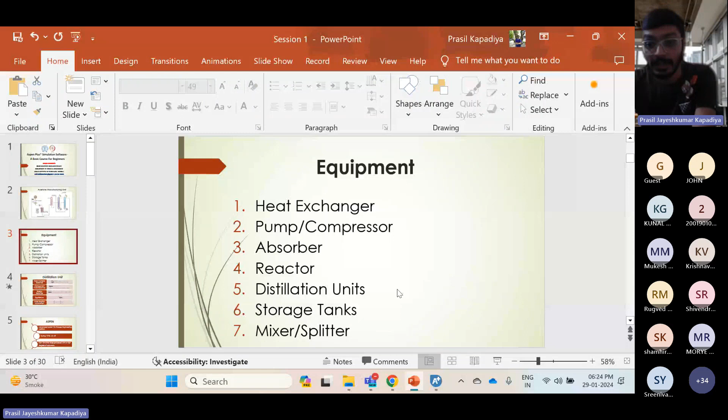Okay, so there are various kinds of reactors, and here in this example, it was a tubular reactor. Now, distillation units. Distillation units are the heart of any chemical engineering plant. Why is distillation so important? Because it is a separation method. After reaction, there are hundreds of things in our product stream. So we need to separate from that mixture something that is useful to us, that is valuable for us. So that's why in most chemical plants you will find distillation units, from very small heights to very large heights.

Then storage tanks. What is the use of a storage tank? To store the products or to store our reactants. After our reaction is performed, after separation is done, we need to store our product at some place and then we transport that product. So for that, storage tanks are used. There are also various kinds of storage tanks.

And mixer and splitter. What does a mixer do? A mixer mixes two or three streams. Let's say for some reaction we need a mixture of two reactants, so for that we can use a mixer, or a splitter to split the streams. Okay, so these are various kinds of equipment that we can see in any chemical engineering plant.

Just a minute, someone is waiting.

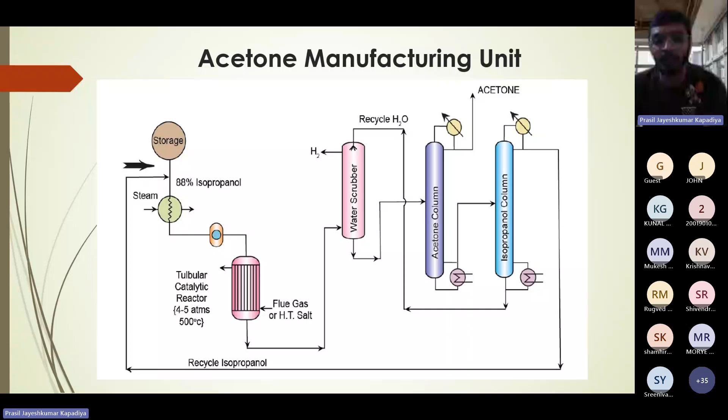Not feasible. Let's say you are operating an acetone manufacturing unit. Your plant manager told you that you need to increase the feed flow rate to meet some market requirement, or we are going to increase our acetone purity. So how will we do that? We will have to play with feed flow rate, with the reflux ratio in the distillation column, and we may have to increase reboiler duty. So there are options, and the plant is already there. Let's say my feed flow rate is 100 and now I want to operate my plant at 130, 150. Can we do that?

Yes. Sorry. Can increase the flow rate? I'm sorry, I can't hear you. Can you repeat? We can increase the flow rate. We can increase it, but we need to check the limit.

Yes, in a plant there are 100 connections. Let's say isopropanol is coming from some upstream unit and acetone is going to some downstream unit. Can we just increase our feed flow rate and just do it? No, we can't do it, because plants are also designed at some particular capacity. You can't go beyond that capacity.

Okay, so in a plant, as one of you already mentioned, we can't solve 150 equations simultaneously and at that time check what is going to happen. Is it going to affect my acetone purity or not? We can't do that. It is not a practically feasible solution.

Correct? So there is a need for something with which we can directly see the effect of feed flow rate, reflux ratio or something, without implementing that in the real plant. Okay, so that's why we are learning Aspen. I hope the motivation is clear to everyone, why we are first learning this software.

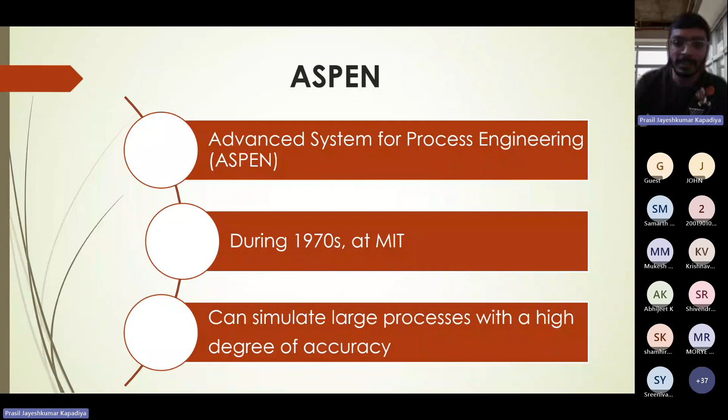So what is the full form of Aspen? How many of you already knew the full form of Aspen before this slide? Yes. Okay, good. So Aspen is Advanced System for Process Engineering and it was developed during the 1970s at MIT. Initially it was developed to solve a series of nonlinear equations, but now we have many Aspen products available. So we can simulate large processes with a high degree of accuracy using Aspen.

Guys, please next time join on time.

Okay, so first let's talk about Aspen Plus. Aspen Plus is basically used for steady state simulations of chemicals. The distillation column equations that I mentioned were unsteady state equations because there was a dM/dt term involved. That gives us time evolution, how our product quality and everything is changing with time. So Aspen Plus is steady state simulation, and Aspen Dynamics is used for dynamic study.

So how does Aspen Plus work? Aspen Plus works on the sequential modular approach. What is the sequential modular approach? Can someone tell me? I guess sir has discussed. It solves equations unit by unit, block by block. Yeah, it solves equations unit by unit, block by block.

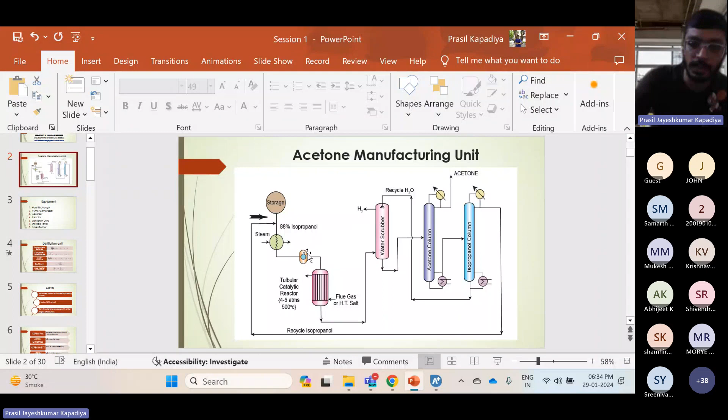Now, I'm sorry, I'm here. Okay, so what can we do with Aspen Plus? Say you are in a plant and you are told to use Aspen Plus. What can you think of doing with Aspen Plus in a particular plant? Let's say with that acetone manufacturing unit, what can you think of doing?

Hello, someone please respond. I'm sorry, you are not audible. Sorry, can you repeat please?

We can find out the head, the flow rate and power consumption of a particular equipment, or the heat transfer area, and optimize the plant. We can find out by Aspen Plus in steady state simulation. In HYSYS, it's a bit complex.

Someone told optimization of plant. That is the best example. We can optimize the plant. Other than that, sensitivity analysis. Yeah, sensitivity analysis. We can see the effect of one parameter on another parameter. Like we can see the effect of feed flow rate, keeping everything constant, on product purity. Then we can see the effect of reflux ratio, keeping everything else constant, on product purity. We can increase reboiler heat duty and see the effect.

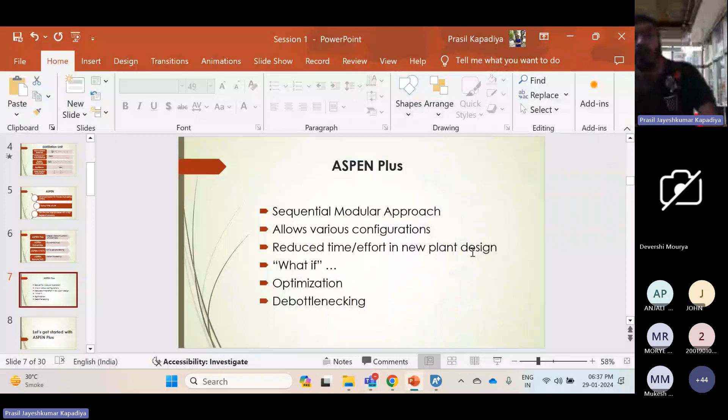Then we can perform debottlenecking. What is debottlenecking? Let's say in any plant, product quality is the issue and no one is able to find out from that actual real plant. So we can perform various analysis and we can debottleneck what is the issue. I guess it's fine for everyone, right? Should I move ahead? Yes, sir. So debottlenecking means solving a problem related to the plant, or troubleshooting is identifying the problem. Yes.

I will share a little story. I was in Reliance. There was a plant, I don't remember the name. They were entering their feed at some particular tray number, and that was not giving maximum product quality. So they performed this analysis: what is the issue and how can we solve that. They changed the feed tray location and saw that if we enter our feed not at tray number 5 but at tray number 10, it will increase our product purity.

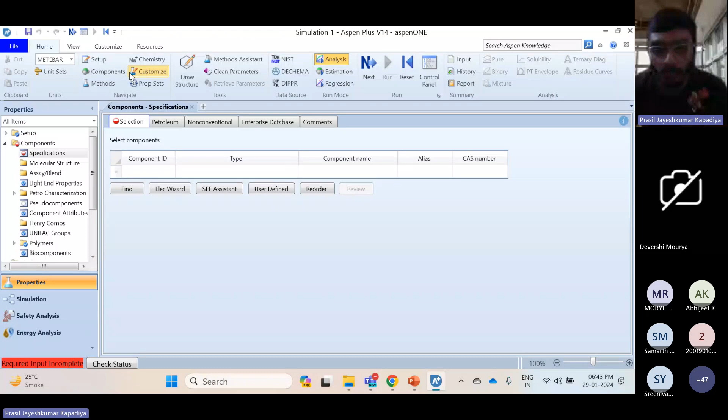You'll have to bear a bit with my internet connection or laptop. Which version is provided to all of you? Is it 14 or some other version? Aspen 12.1. Okay, you guys are provided with 12. Okay, this one is 14.

I have 14. Okay, so first, when you open the window, you have this properties tab, simulation tab, safety analysis and energy analysis. Currently, it's not important for us. Then in the top screen, this one is for units. These are English units, this is metric unit with Celsius and bar, and SI unit. In English units, pressure is in PSIA, mass flow is pound per hour, mole flow is pound moles per hour, enthalpy is British thermal unit per hour, and volume flow is cubic feet per hour. So according to our requirement, we can choose units, or we can change it later. So this is about units.

Then the analysis part we will do today, so I will show it to you. Then, let's go for components, how to add a component. So first go to find. Let's say I want to add benzene first. So I will write benzene and click find now. So there are so many options available. If you can see here, begins with, contains and equals. I have chosen contains, so all components that have benzene in their names will be shown here. If I go for equals, it will only show benzene. So it is up to your requirement.

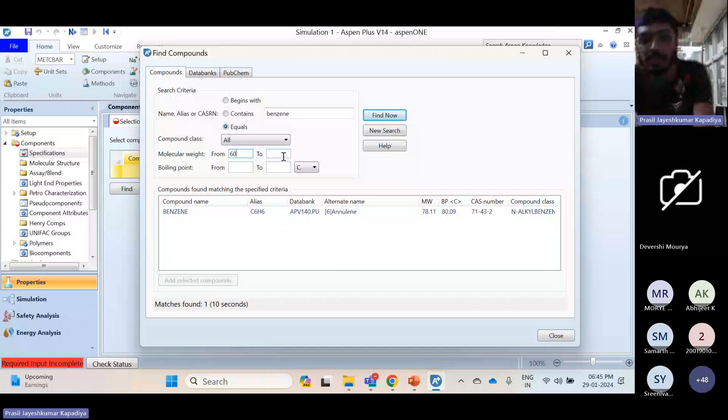Then we can also search our compounds based on molecular weight. Benzene has a molecular weight of 78. So let's say I want to search from 60 to 110, and let's see what it gives. So in this database, only benzene is having 78.11 molecular weight. Okay, I have chosen equals. If I go for contains, it will show everything within 60 to 110. I guess this will be a huge list because we have chosen contains.

Someone is joining. Guys, please join on time from next session onwards. Okay, I'll close this currently.

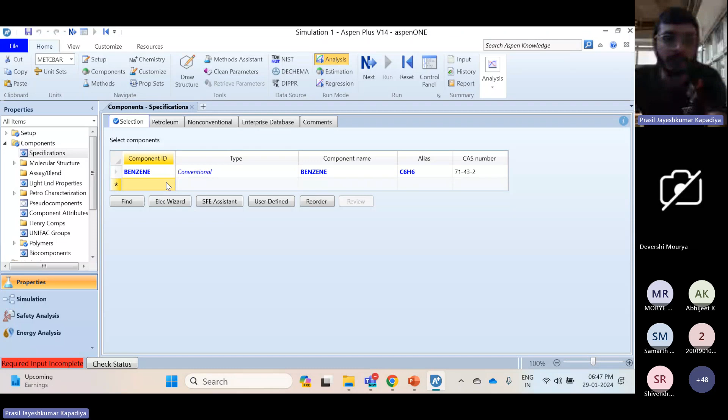So we can add a component. Let's say I'm currently going for benzene only. I'm typing benzene, find now. Then I will add this component. Now, let's say I want to change the name here; this is the component ID. This name will be reflected in your stream results. Like if you have given BENZ01, it will show BENZ01. So we can change this name from BENZ01 to benzene. And what is the limit? How many characters can we add? Anyone? 8 characters. Yeah, up to 8 characters we can add. Let's say I'm trying to write benzene 1, 2. I can't go ahead, it won't allow me. Okay, so just benzene.

One more thing I want to show. These are the data banks from where the properties are selected, and you can also search from PubChem. Like say I want to search m-cresol.

So it will appear here. Yeah, all components containing m-cresol will appear. Okay, so this is how you can add components. Components can be added based on the name, plus if you know the molecular weight range or if you know the boiling point of the component. So you can add components like this.

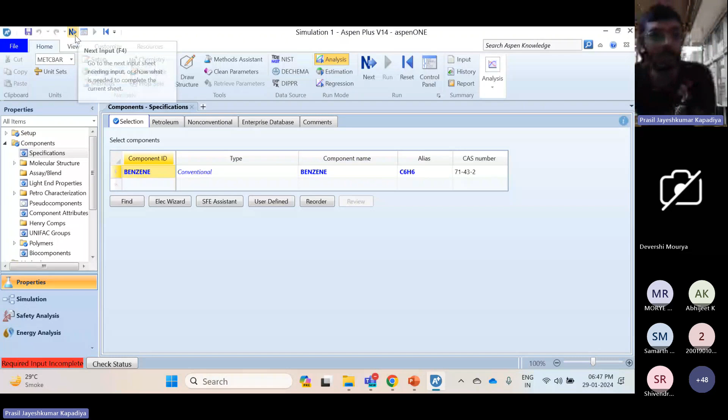Now, okay, I have already added benzene. Now I want to move ahead, so just click on the next button. This is the next button, with the arrow. So here, this is the section for methods specification. Why do we need this methods specification section? Can anyone tell? To estimate the properties, maybe thermodynamic or chemical properties, physical properties.

Okay, so from this section, we can add methods. Say I want to simulate my block using NRTL, so I will use NRTL. What is NRTL? NRTL is non-random two-liquid theory. If it's a gas-phase reaction, someone may want to go for the SRK equation of state, or let's say VTPR. VTPR is nothing but the volume-translated Peng-Robinson equation of state, or some liquid activity coefficient model, UNIFAC or UNIQUAC. So we can choose these models from here.

So this depends on which kind of system you are working with. We will see one example where we are using an ideal system. So what is an ideal system? That basically follows ideal Raoult's law. We'll see this. So I'm just adding this. Currently, it's not important.

Okay, one more question I have. In petroleum calculation options here, you can see it is free water method. What is free water method? Can someone tell me? It will not be useful for us currently because it is mainly for petroleum products. But since it's already there, can anyone tell me what is free water method? If we have water as one of the chemical components? Sorry, I couldn't follow you. No.

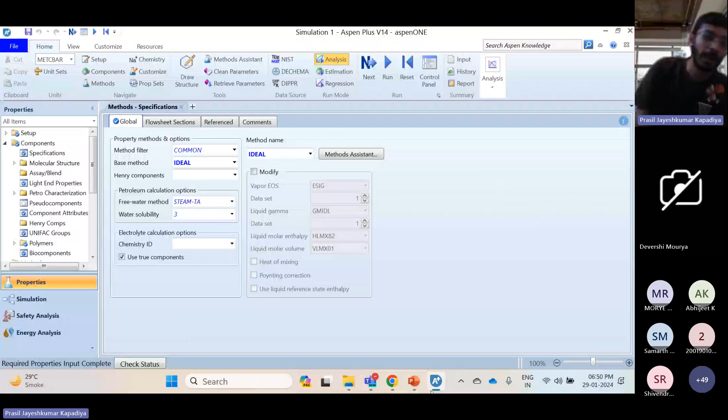Okay, I will tell you. In oil processing units, we get two phases, a water phase and an oil phase. Water is also soluble in the oil phase. If solubility is very low, we are safe. If we don't consider that water is soluble in oil, our calculation load will reduce. So that is basically the free water method. It does not take into account the solubility of water in the oil phase. So it's not important for us, don't worry about it.

Now let's go for next. So here, this is our simulation window. Currently there is one red symbol, flowsheet not completed. We have not added anything, so we can't run anything. This half red symbol shows that something is missing. It's not completed. So let's start with mixer. Mixer I already discussed, we want to mix streams. Then FSplit and SSplit.

If any of you have already followed the second week lecture, can you tell me what is the difference between FSplit and SSplit? Has anyone watched the second week lecture? Okay, no. Let's leave it for now, we will discuss this next week. There are two kinds of splitter. Now separators. We will be simulating a flash drum today.

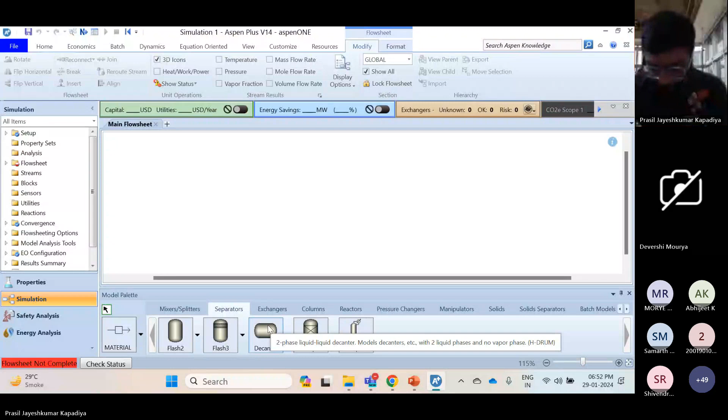Then decanter: we all know a decanter separates products based on density difference. So if I want to separate oil and water, will water be at the top or bottom? At bottom. Bottom. Sorry. Bottom. Okay. Now we'll go for exchangers. So someone is saying something.

I guess no. Okay. Now we'll go for exchangers. So exchangers, someone already told in slide 2 that a heat exchanger is used to transfer heat from process streams. So there are various kinds of heat exchanger. This is simply Heater. This is HeatX. HeatX generally takes shell and tube heat exchanger where two streams are co-current or counter-current. This heat exchanger design we will see in next Monday's session.

Then these are multiple heat exchangers. So what does MHeatX take? It takes various. Let's say I want to heat up three streams using two streams. Like say I want to heat up benzene, toluene, xylene using water and something else. So for those kinds of conditions, we can use this multi-stream heat exchanger.

Then this HXFlux is basically used to estimate LMTD. This also we will take an example of next week. Sir has already covered this in the week 2 lecture. So we will leave this for next week.

Now for columns, there are also various kinds of column. These are distillation columns. So this first is DSTWU that works on a shortcut. This is a shortcut design method of distillation column that works on the Underwood Gilliland method. We will see all these equipments. We will see mixer splitters, exchangers, and columns in next class. So I'm just giving you the overview.

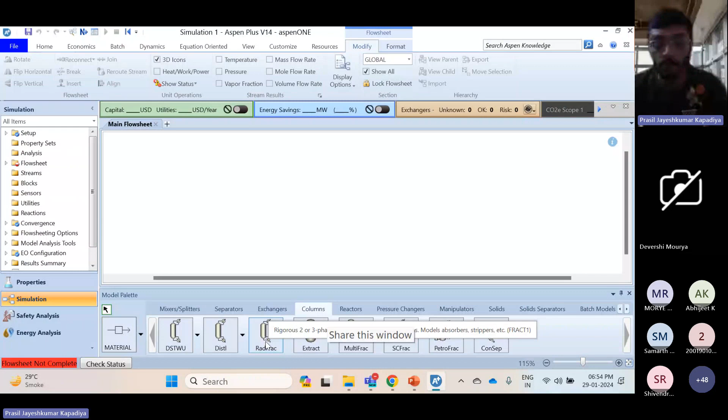Then RadFrac column uses rigorous criteria that doesn't just use this shortcut method. It actually performs all kinds of calculations to estimate the values of product quality, reflux ratio, and all. Then next is the extraction unit. So the extraction unit is, let's say I want to perform a liquid extraction. Let's say I want to remove levulinic acid from water using some solvent. So for those kinds of application, we can use this extraction unit.

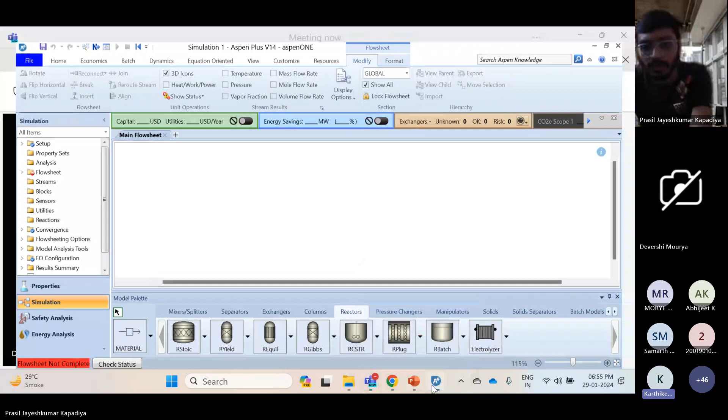Sir, in Aspen 12.1, we don't have columns. I don't know why, but we don't have it in our functions. No, columns must be there. Column was even in Aspen version 8 when I used it. No, sir. We have controls one, controls two, pressure relief, mixers and splitters, separators. So is separators in columns? No. Then we have heat exchangers, reactors, pressure changers, manipulators, polymer models, and model chest. That's it. Okay, when we are going for the example, I will see what is the issue. You can share your screen at that time. You can try and reopen the application. I am using the same 12.1. I have columns in my Aspen software. I have used Aspen version 8 some years ago and it was already there. So columns, they can't remove columns. It must be there.

Okay, then next these are reactors. So we will not be simulating reactors for now. It may take week 3, week 4 or so on. At that time we'll go for reactors. So generally CSTR, continuous stirred tank reactor, plug flow reactor, batch reactor, and these are some stoichiometric and yield-based. This we will see when we will be performing reactor calculations.

Then we have pressure changers. So pump and compressor, I have already told you, pump is used for liquids mainly and compressor is used for vapor. Then these are multiple compressors in series. Then valves, you can go for control valve application, what percentage opening we should keep of a control valve.

Then there are pipelines. Pipelines are generally used for hydraulic studies. So I don't think we will be using pipelines for now. And these other options won't be useful for us. These are mainly for solid operations and I guess it won't be covered. And if it is covered, we will see how to do that. Okay. So we'll take some example now.

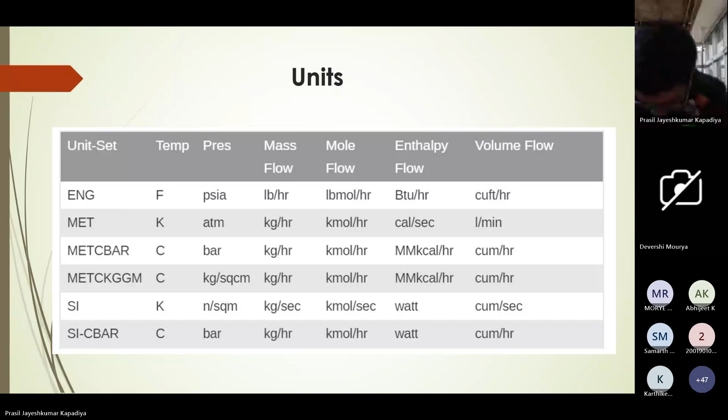Sir, can you hear? Yes. Sir, you need to admit all participants. So you can go in settings and remove that option. Okay, I'll keep this for next time. I don't know how to do that. But everyone should join by 6. If the time is 6, everyone should join by 6 or 6:15, not at 7. I will figure out how to do it.

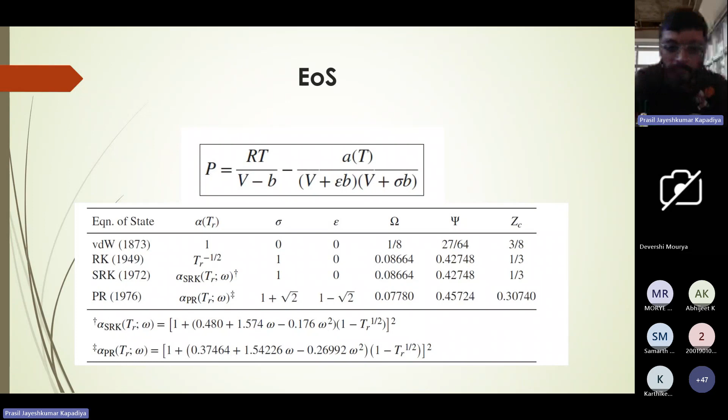Okay. So units we have already discussed. Now equations of state, those I was talking about, Van der Waals equation of state, RK equation of state, SRK equation of state, PR equation of state for gas phase. I'm sure all of you must have learned these in your chemical engineering thermodynamics. How many of you have performed the calculations to estimate volume of liquid and vapor on pen and paper? Most of you may have, I guess. It is in the Smith, Van Ness and Abbott book, and it is a painful process. In Aspen, it takes these parameters in a different way, but the basic concept of all equations of state is this only.

Then, okay, let's start with Raoult's law. So, in a closed system, liquid and vapor at temperature T and P are in equilibrium with composition xi and yi. So, for Raoult's law, I am talking about ideal Raoult's law. Ideal Raoult's law assumes that the vapor phase is in its ideal state. So, when can we say that the vapor phase is in an ideal state?

Two points. I guess everyone knows: when interaction between molecules is negligible and the volume of the molecules is negligible compared to the volume of the box, we can consider the vapor phase as ideal. So generally, we consider ideality in the vapor phase at high temperature, low pressure. It behaves ideally, so we don't need to worry about ideality of the vapor phase.

But the main problem is ideality in the liquid phase. In Raoult's law, we assume that the liquid phase is also ideal. So can anyone tell the properties of an ideal solution, when we can consider the solution ideal? One by one. Sir, we can consider the solution ideal when the pressure is very low and the temperature is very high, so that the intermolecular interactions are purely elastic.

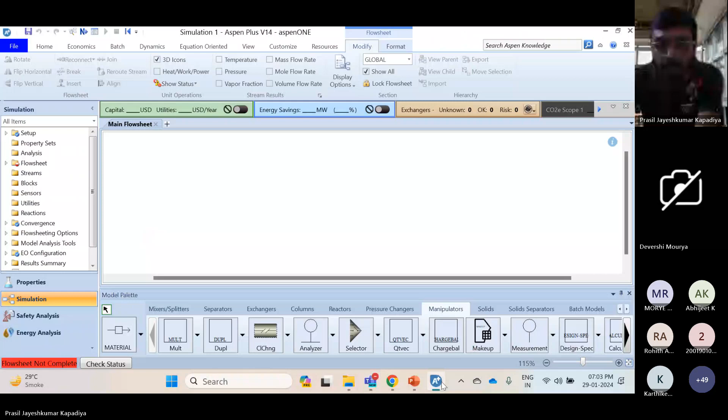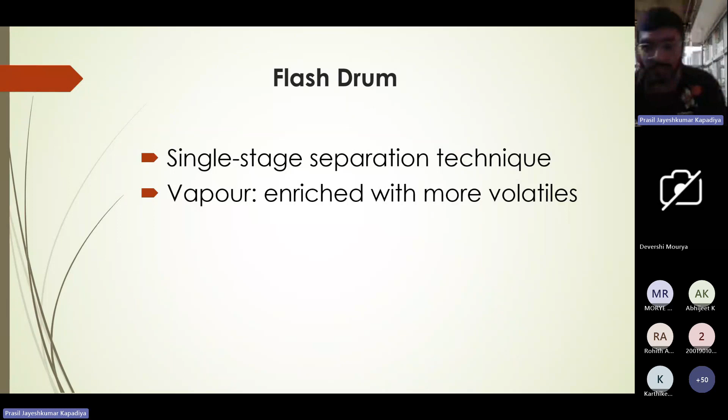Okay, so we will be working with Raoult's law for today's session. And there is one example with the Wilson equation also that we will see when it comes. So first, we'll be seeing the flash drum. A flash drum is nothing but a single stage separation technique in which the vapor stream is enriched with more volatile components and the liquid stream is enriched with less volatile components.

So how is the flashing operation performed? We reduce the pressure of the feed stream or we increase the temperature of the feed stream. This we will see through three examples actually, not one. So this is the flash drum. We are feeding something with F flow rate, and we are obtaining V and L, vapor and liquid, and this Q is the heat duty that we need to provide.

So these are the equations. Sir has already discussed this, so I will not go into the equation part, but that is nothing but F equal to L plus V, that is the overall balance, then F XF equal to L XL plus V YV, that is the individual component balance, then this is Raoult's law, K equal to Psat by P equal to Y by X. Here you can't see any phi term or any gamma term, so this is ideal Raoult's law.

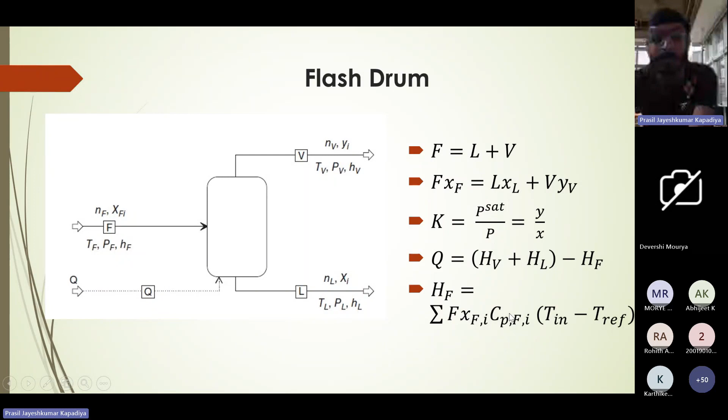Then Q, the heat duty, is nothing but the heat of the vapor plus liquid streams minus the heat of the feed stream. So that is the heat duty that we need to provide, and that heat can be calculated using m Cp delta T. F into XF is the flow rate of that particular component, Cp is the heat capacity of that particular component, and delta T is the temperature difference. So let's start this example of the flash drum.

In the flash drum, first, let's see what the question is. A liquid mixture consisting of 60 mole percent benzene and 40 mole percent toluene is fed with a flow rate of 100 kilomole per hour at 3 bar and 25 degrees Celsius to a flash chamber. It is operated at 1.2 atmospheric pressure and 100 degrees Celsius. Here we have increased the temperature of the stream. So applying the ideal property method, calculate the amounts of liquid and vapor products.

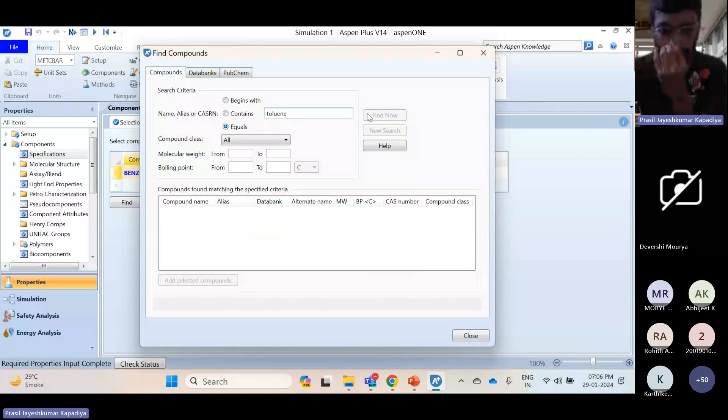Okay, I will show you how to solve this. So first, we will add our components. We have benzene and toluene. Benzene I have already added. We will be adding toluene now. I will go for equals. There are so many options available. Yeah, toluene. Add. So I have added benzene and toluene. I will rename it as toluene.

Now just use this next button. Okay, first we need to change the property method. For the specification, we are using ideal. The ideal property method uses Raoult's law and Henry's law. So this is correct. Now we will go to simulation and prepare our setup.

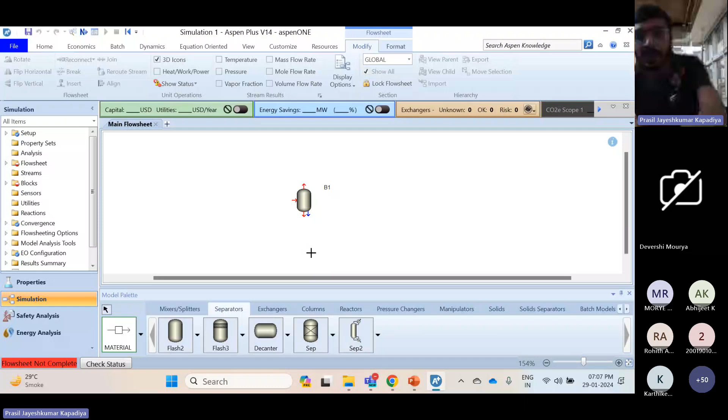Flash is a separation unit, so from the separators part we can add Flash2. So here I am adding Flash2. Flash2 has one feed stream and it will give one liquid stream and one vapor stream. So by using this material option, we can add streams. Whatever you are seeing as red, you are supposed to give. Without that, you can't move ahead.

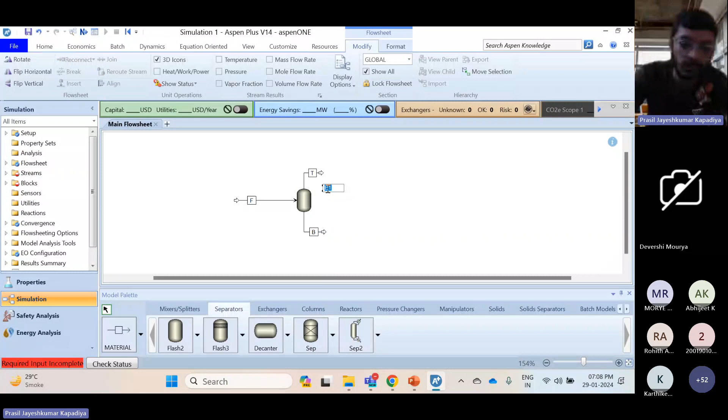So we are giving the feed stream. Okay, there's an issue. I can delete it, or I can reconnect to source. And this is bottoms. So I will change the names: feed F, then top and bottom. And I will change the block name to flash. You can skip this, it is up to you.

Now we can either click this F stream, and it will navigate us to enter the feed specification, or we can just directly go to next. We are going to next, and this is the F material input stream. The feed temperature is 25 degrees Celsius and pressure is 3 bar. So let's add 25 degrees Celsius. You need to check the unit, and 3 bar. If you want to change the unit, you can change it from here. Then the flow rate is 100 kilomoles per hour.

Now, 60 mole percent benzene and 40 mole percent toluene. So from here, I will add mole fractions: 0.6 benzene, 0.4 toluene. If you don't give 0.4 toluene, I guess it will automatically take 1 minus 0.6, because this has turned to indicate that input is required.

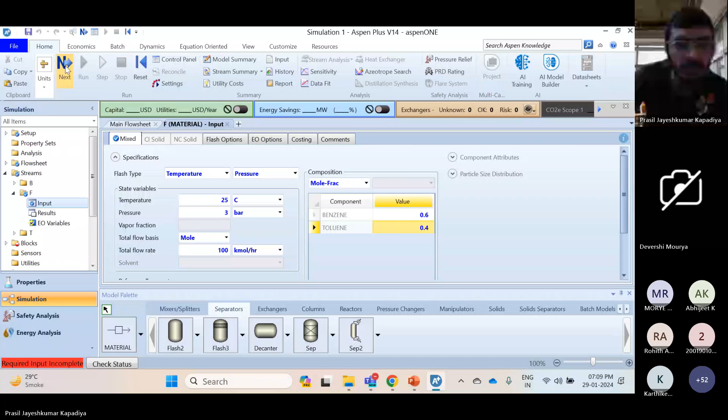We have fulfilled our input requirement for this particular section. I will add 0.4. Now we can go to next. Okay, here this is flash 2. So here we need to add flash condition. So what is the flash condition that we are having? We have 1.2 atmospheric pressure and 100 degree Celsius. So here 100 degree Celsius and 1.2.

Now I have to change it to atmospheric. Okay, wait, it's not happening. Atmospheric. Okay, there are many options like we can provide heat duty, we can provide vapor fraction. We will see what we can do with vapor fraction. Okay, now see here, required input complete. So now we can run our simulation. So I will just press run. It's taking time.

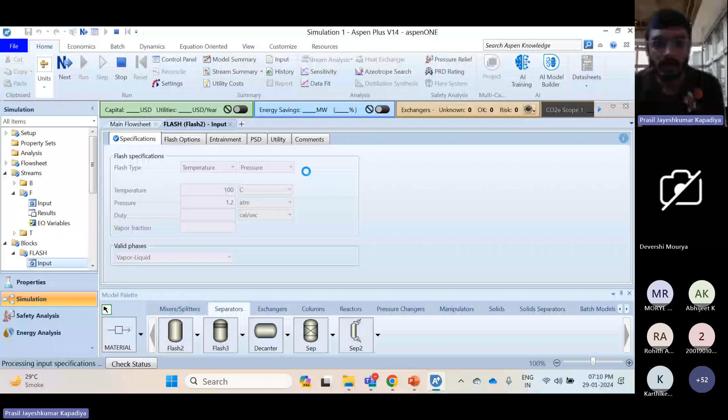Okay, so here we can see that results are available. Let's go to result summary and streams. Okay, so from this, let's go for just mole fraction part right now. So feed had 0.6 and 0.4. What is more volatile, benzene or toluene? Obviously benzene, because toluene has one CH3 group on the ring, so it will not vaporize easily.

So benzene we will obtain from top and toluene we will obtain from bottom. So these are the mole fractions that we are getting. Benzene as 0.66 and toluene as 0.55. So what we can check here, we can check our material balance. F should be equal to B bottoms plus top flow rate. That must happen, else it won't run. You can check this by your own. Okay, so this is the example of flash drum.

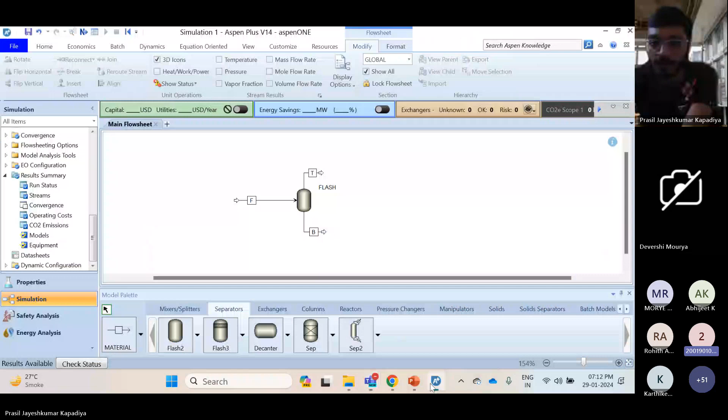Okay, is anyone having any query? Okay, I guess the answer is no. So this is the optimized solution or just a solution? No, this is not optimized solution. This is just the solution. Okay. Now, at least for those who are having Aspen, I want you to try this example. I will also show how to solve it, but for now I want you to try.

So what is written? A liquid mixture consisting of 60 mole percent benzene, 30 mole percent toluene, and 10 mole percent of xylene. It is flashed at 1 atmospheric pressure and 100 degrees Celsius. The feed mixture with a flow rate of 100 kilomole per hour, that is our feed flow rate, enters the flash drum at 1 atmospheric pressure and 80 degrees Celsius. So using the ideal property method, compute the amount of liquid and vapor. Okay, so can anyone tell what will happen?

Yes. So can you guys start simulating it? I will also show, but I want you to try by your own, at least for those who are having Aspen in their PC. Okay, just first complete the part A, then we will discuss part B. Or does anyone want to share their screen and show everyone how to solve it? That is also fine for me. Anyone volunteer? Can I share? Okay, you do it. I will stop sharing my screen. Now you do it.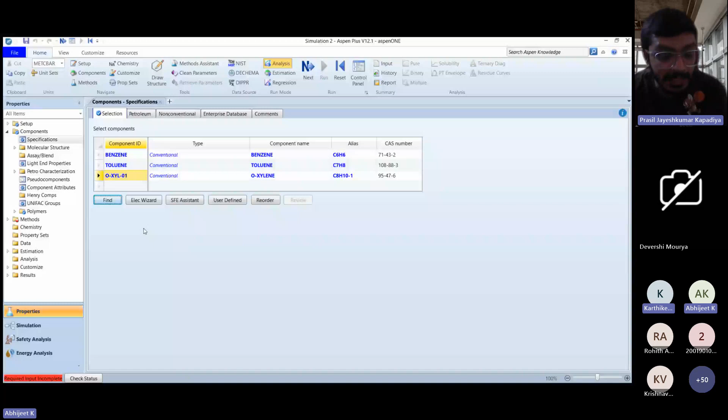Now see, he has added all three components, benzene, toluene, and xylene. Now what he needs to add? He will add property method. So just press next. Okay, so what is the property method that we are supposed to use? For benzene toluene, we are using ideal property method. Is this valid if we go for ideal property method?

Sorry for the interruption. How can we choose our property method for a particular process? I'm just talking about this benzene-toluene. For benzene-toluene, is it valid to use ideal Raoult's law, y·P = x·γ·P^sat, where we are taking gamma? Why? I'm just generally asking, sir.

Because benzene and toluene have similar molecular weight. Yeah, you're correct. I am not saying you're wrong. You're also correct, whoever responded. Benzene and toluene are closed-ring compounds. Yes, that's why we can use ideal. For xylene we can also use it. Up to some extent, we can go for it because those are similar molecules: benzene, toluene, and xylene.

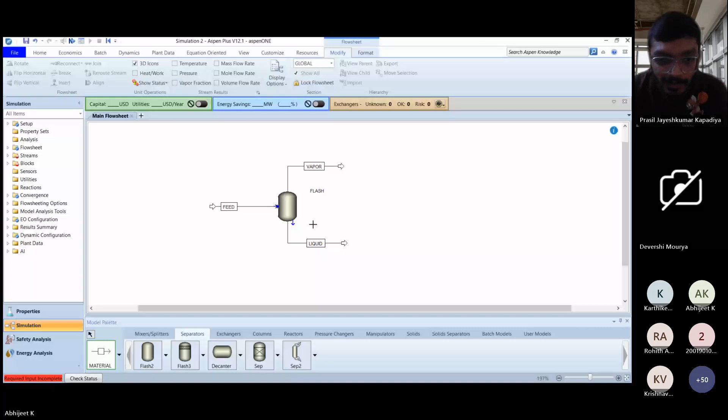Okay, now go to next. Or directly go to the simulation window. Yeah, you can directly go there and add a flash drum. Okay, you added the flash drum. Then materials. It's a bit lagging, I guess. Is it for everyone or just for me? For all. Okay. Yes, it's lagging, it's a bit slow.

Now go to next and add the feed composition. We have 60 mole percent benzene, 30 mole percent toluene, and 10 mole percent xylene. Don't forget to change composition from mole flow to mole fraction. It will create a huge mess. These are small mistakes that we also made when we were learning. 60, 30, 10. Then 1 atmospheric pressure and 110 degrees Celsius. 80 degrees Celsius, right? 110 degrees Celsius and 1 atmospheric pressure.

No, in the problem statement, the feed temperature is 110, and the flash condition was 80 degrees. Sorry. Flash condition is 80 degrees Celsius and 1.5 atmospheric pressure. Feed flow rate is 100 kilomoles per hour. Then go to next. No, the feed was at 80 degrees, right? No, the feed is at 110 degrees Celsius and the flash drum is at 80 degrees Celsius.

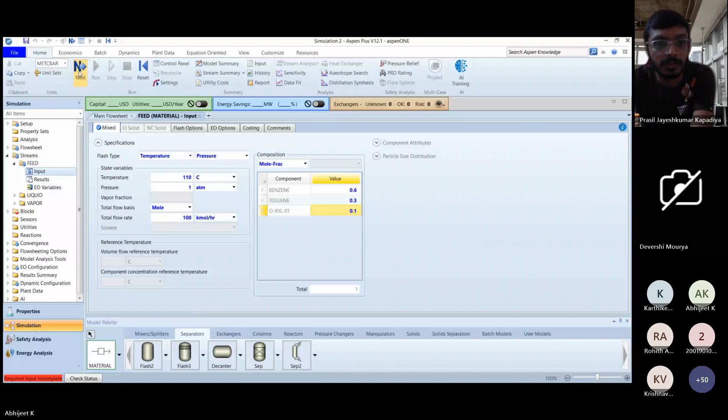Okay, I guess we have written it. Now you can see required input complete, so you can run it. Just run it and see what happens. Processing input specification, it will take a bit of time. Generating results. Results available. Go to result summary, this option, and streams. Is anything happening? Nothing is happening, right? Yes, vapor is zero.

So we can't simulate it because either we need to increase the temperature or we need to provide some heat duty. So what was part B?

I'm not able to see the screen, sorry. Hello. I'm not able to see the screen. Whose screen? Abhijeet's screen. It is visible to us.

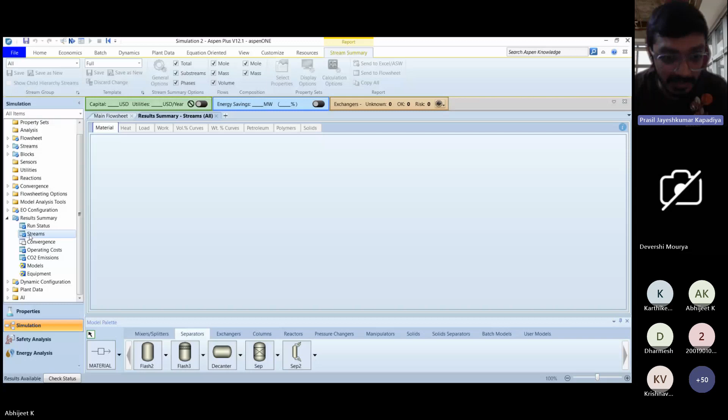Just do it, Abhijeet, and display the results. Okay, results available. I have reset and again run the simulation. Now results are live. It may not affect your results, but this is a good practice to do: first reset it and then simulate it. So see what is happening. All your feed is converting into vapor.

So what is this phenomenon called? If you have learned this in your thermodynamics course, what is this phenomenon called? Please someone respond. What is this temperature called? 120 is not the exact temperature. Azeotropic condition? No, not azeotropic condition. Azeotropic condition is when your y and x are same and you can't separate it at a particular temperature. Boiling point of mixture? Saturated temperature? No, that is a particular term that you have learned in thermodynamics.

So this is called dew point temperature. I guess you know bubble point and dew point. What is bubble point? When the first droplet of liquid is converted into vapor, that is bubble point temperature. And dew point temperature is when the last droplet is converted, meaning it is all vapor now. So if I go for 130 degrees Celsius, it will show all in vapor phase, right? At 130 degrees Celsius also it will show.

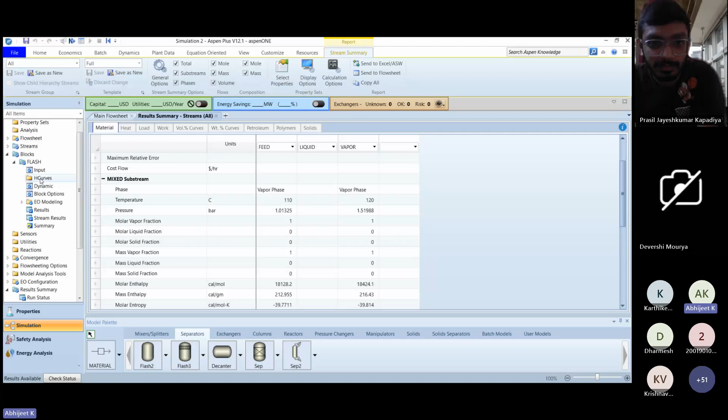So how can we say whether 120 or 130 is our dew point? How can we measure the dew point? There was an option in the flash drum block. Can you go to the flash drum block? I'll show it to you. These parts are not covered by sir, but I'm trying to show it to you. It will be useful. Go to flash. It's not visible yet to us.

So we need to find the temperature at which our whole liquid is converting into vapor. So we will remove the temperature and we will go for vapor fraction, and write vapor fraction as 1. At 1.5 atmospheric pressure, whole liquid is converting into whole vapor, and we need to know that temperature. So go to that temperature part and choose vapor fraction. We don't want to specify temperature; we want to find the temperature at which y equal to 1 is happening. Write vapor fraction 1, then reset your simulation and run it. So we will be getting the exact temperature.

I guess you have learned this bubble point, dew point. Am I correct or not? Yes, we have learned. Why have we given vapor fraction as 1? Because we want to calculate dew point. What is the dew point? When the whole liquid is converting into whole vapor, what is that temperature at 1.5 atmospheric pressure, at which it first converts whole liquid into whole vapor.

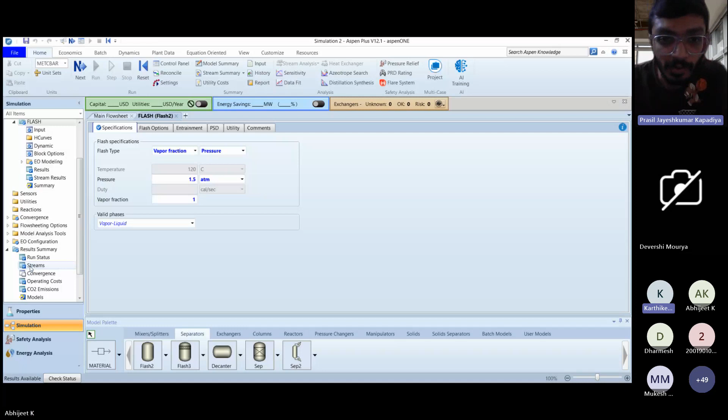Initially, in part B, we used 120 degrees Celsius and checked that the whole liquid is in vapor. But we don't know if that is the temperature. It will be in whole vapor phase at 130 degrees Celsius also. So here we want to check at what temperature vapor fraction becomes one, and that temperature is called dew point temperature. For bubble point, we can keep it as 0 and check it, right? Yes. So see, what is the temperature? 118.17 degrees Celsius.

Sir, when vapor fraction is equal to 1, is that the sum of vapor fraction of benzene and toluene both? Yes, everything is vapor. The summation will be 1. Everything will be in vapor phase. Just go to the mole fraction option. See, everything is in vapor phase and the summation is 1. Not individual; individually it can't be 1, otherwise it would be 1 plus 1 plus 1, 3. That is not right.

So this is called dew point temperature. That is 118 degrees Celsius, 118.167 degrees Celsius. This is your dew point. Can anyone tell me how we can calculate bubble point and dew point mathematically?

Those are formulas, if you remember, in chapter 11 or 12 of Smith, Van Ness and Abbott. Antoine equation? No, the Antoine equation is for saturation pressure calculation. What is the equation for bubble point? Sir, Raoult's law with activity coefficient. Activity coefficient is fine, but we are assuming ideal conditions here.

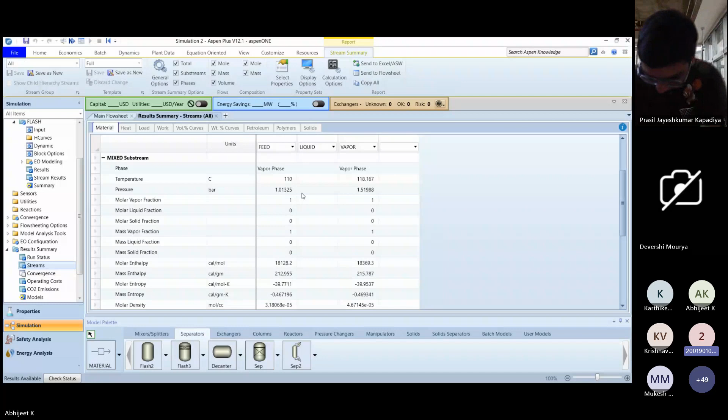If you want to calculate temperature, it is an iterative process. But if you want to calculate the pressure, we can directly estimate it. You want to calculate bubble point pressure at a particular temperature, right? Okay, we know that P is equal to x1 into p1sat plus x2 into p2sat. And here we put x1, the mole fraction of feed.

No, here we are calculating dew point, not bubble point. So it will be 1 upon (y1 by p1sat plus y2 by p2sat). This is dew point, not bubble point. Wait, I will tell you how we will proceed. Your equation is P is equal to... I'm sorry, I don't know how to write it.

Is it required to show the equation from the book? Can I open the soft copy of the book? Okay, you open it. Or if you want, you can stop sharing. Actually, this problem is anyway over, so you can stop sharing. Thank you. Wait, just give me a minute. I will share my screen and show it to you.

Thermodynamics, Smith. Which books are you following? Van Ness and Sandler. Okay, Sandler is also a good book. I learned from Smith and Van Ness during my BTech. So, which is the chapter? Chapter 12. Wait, I will now share my screen so it will be visible to all of you. Can you see?

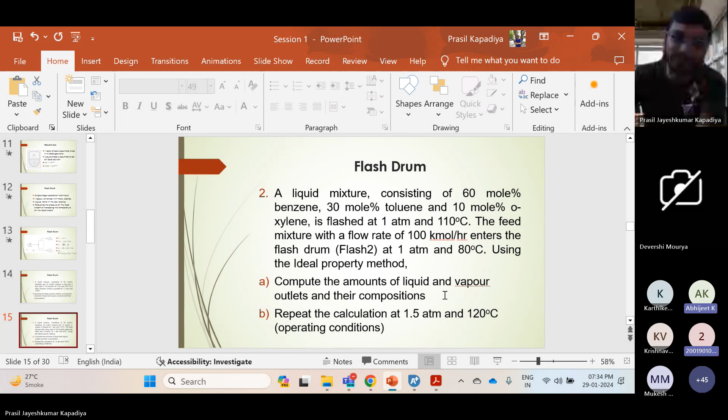I'm giving you somewhat difficult problems because sir has not given this kind of difficult problem. But if it's not fine for you, let me know and I will prepare some simple problems. No sir, it's fine. Okay, now we are going for one more difficult problem than this. Most of you have learned TXY and PXY plots in distillation, I guess.

Yes, we have. In thermodynamics also you have learned. So we will plot one TXY, PXY plot and XY diagram. XY diagram you all have used in distillation column in the McCabe-Thiele method or Ponchon-Savarit method. You need that equilibrium diagram XY. So we will generate it.

So, okay, I will solve this problem. It will be a bit difficult for you. I need to show you how to do it. So, problem 3. Okay, I have already solved it, so I will just show you the steps how to do it. Or do you want me to solve it again? I can do it if you want to. If you solve that, it will be better. Please start it. Okay, I will solve it then.

Wait, let me first figure out this admit thing, because people are joining very late. This is not good. Just bear with me and my laptop. Yeah. Okay.

We will do it. New simulation I am choosing. Yes, I want to close the current simulation. Okay, so what are the conditions? A binary mixture consisting of 60 mole percent ethanol and 40 mole percent water is introduced into a flash chamber with a molar flow rate of 120 kilomoles per hour at 3 bar and 25 degrees Celsius. Use the Wilson activity coefficient model as a property method.

Okay, I would like to first stop. Can we use the ideal model here? We can't use the ideal model here, right? Because ethanol-water is not an ideal solution. We can go for many other property methods like NRTL, UNIFAC. Here we are using the Wilson activity coefficient model. So what is the Wilson activity coefficient model? This Raoult's law is basic.

Y into P into phi is equal to X gamma P sat. So phi, this Wilson model assumes phi equal to 1. That means our vapor phase is ideal. So we just need to deal with gamma. These are the gamma equations, ln gamma 1 and ln gamma 2. These terms lambda 12 and lambda 21 are interaction parameters, because ethanol and water have some interactions between them. That's why this lambda 12 and lambda 21 we need to add.

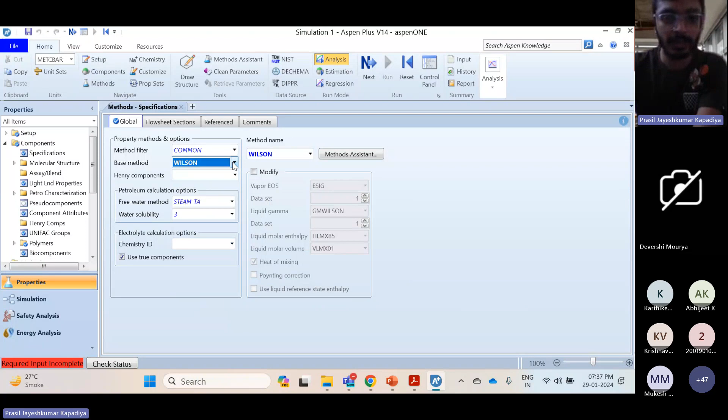I will choose Wilson. Wilson won't be available here; that is not a base method. Our method name is Wilson. Wilson will be at the end, under W. And the base method, then it will take Wilson. Okay. So we need to add the Wilson property method. Now, okay, wait. I forgot to show you something. Okay. Properties. I am going to next.

So this is showing interaction parameters, right? Aij, Aji, Bij, Bji. These are interaction parameters between ethanol and water. So we don't need to change anything here. We will just press next. Estimating using UNIFAC? No, we don't want to do that. Why? That is not important for now. For calculating the interaction parameters, it uses some different method. That is not important for us now.

Someone is not muted. Okay, that is not important for us right now. So what we need to do, we need to go for a separator, flash drum. Everyone can see, right? Yes, we can. We have top, bottom. This is feed. This is top. This is bottom. You can do these things if you want to. These are not mandatory, but this is a good practice to do.

Now I will be adding the feed flow rate. What is the feed flow rate given to us? 120 kilomoles per hour, 3 bar and 25 degrees Celsius. Okay. Sorry, I forgot.

120 kilomoles per hour, 3 bar. What was the preset? 25 degrees Celsius, right? 25 degrees Celsius. And our composition is 60 mole percent, 60 and 40. So first change from mole flow to mole fraction, 60 and 40.

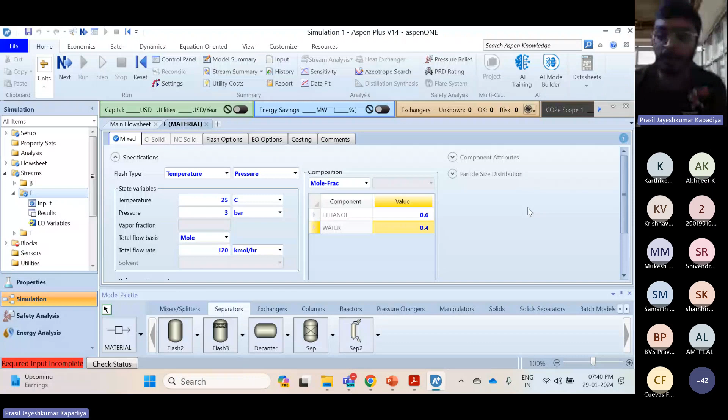Okay. Now, if we are going directly for a flash drum, we need to enter temperature and pressure, correct? Hello, correct? Yes, sir. But what we are willing to do is develop a TXY diagram at 1.01325 atmospheric pressure. I guess pressure is 1.013 bar.

So one way, we can change our temperature every time with that pressure and plot that diagram, right? But we don't want to do that. We already have software. So just see here carefully. We will first go to properties. Then we will click on this analysis.

Then we'll choose binary. Why binary? Because we have ethanol and water. It will show. Now, our pressure is 1.01325 bar, correct? And I am taking 0 to 1 in mole fraction, 50 points. So let's first run this and see what happens.

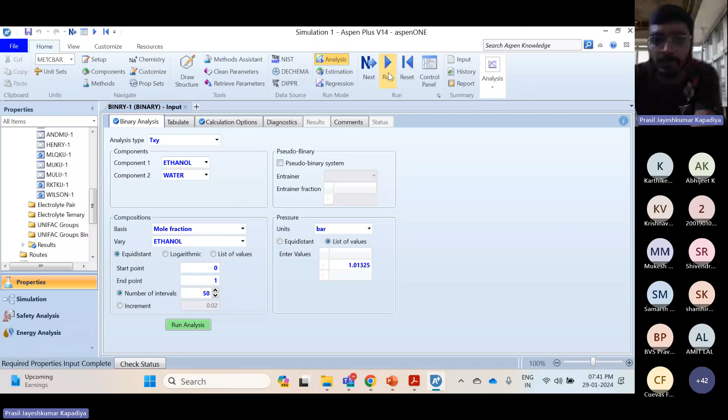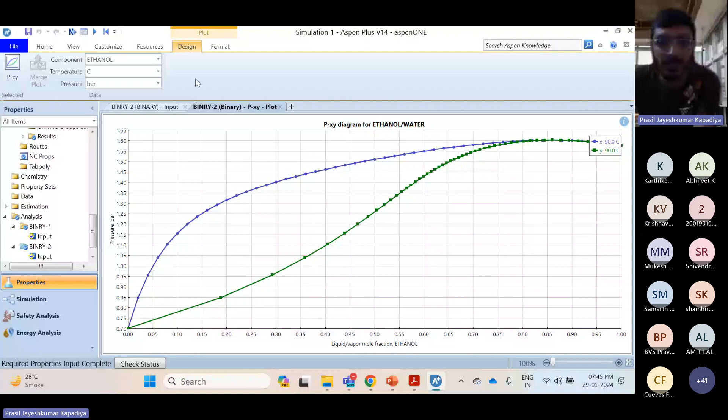So we have PXY plot, correct? It is the same method. And this plot is at constant temperature. And now I want to plot XY diagram for this temperature pressure condition. So what will I do? I will just choose XY plot, and it will show me XY plot.

Okay, so I guess it is clear to everyone. You can play with these parameters. Now, one more thing I want to show, but I am not sure if it will work or not because I have not tried. But let's try here. We know that ethanol water forms an azeotrope, right? Does anyone know the azeotropic conditions?

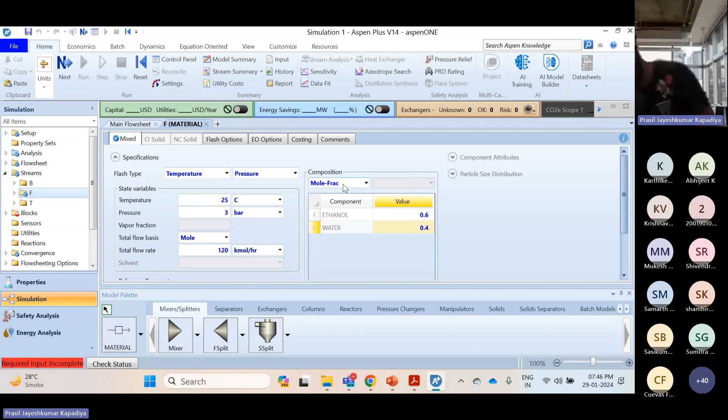Yes. What is the condition? 97% ethanol, I thought so. 97 what percent? Weight percent or mole percent? No, that is weight fraction. 96 weight fraction ethanol and 4 weight fraction water. And if we convert it into mole fraction, it is around 87 and 13 mole fraction, I'm not sure of the value.

So let's try with azeotrope search. I want to search whether an azeotrope is forming or not. So I will choose this ethanol water. It is not complete. Why? Okay, I need to give some temperature here, some conditions. I can give 110, and I'm just giving it at 1 bar. So for this, I want to search.

Increasing this view again. So I want to search azeotrope. First, at any condition, we are just seeing. Now we'll do azeotrope search. Oh, it's not working. First, we need to run. So see, 78 degrees Celsius. Can anyone check on Google what is the azeotropic condition?

How did you reach here? Wait, I will show it to you. Just give me a minute. Oh, I am not able to access. I don't know how to minimize it. Can anyone check on Google what is the azeotropic condition? Yeah, I can see. Someone has asked me how did we reach there. I will again show you.

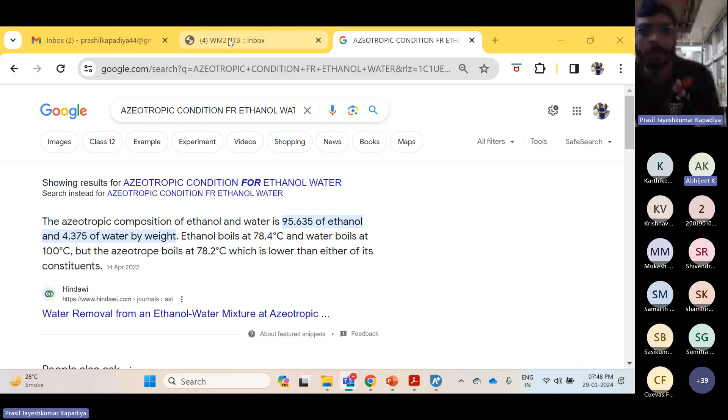Azeotropic condition for ethanol water: 95.63% ethanol and 4.37% water by weight, at 78.2 degrees Celsius. So here what are we getting? 77.9, about 78 degrees Celsius. And this is mole fraction; we can change it here to mass fraction. So it is 0.946 and 0.054. So we are not getting accurate results, but we are getting very near.

This accuracy will depend on what kind of model we are using. It will affect the TXY plot and the XY plot. Is this clear to everyone? Sir, can you repeat the step? How will I find it again? Okay. Just enter some conditions, pressure and temperature, in the flash drum. Then go to this azeotrope search option.

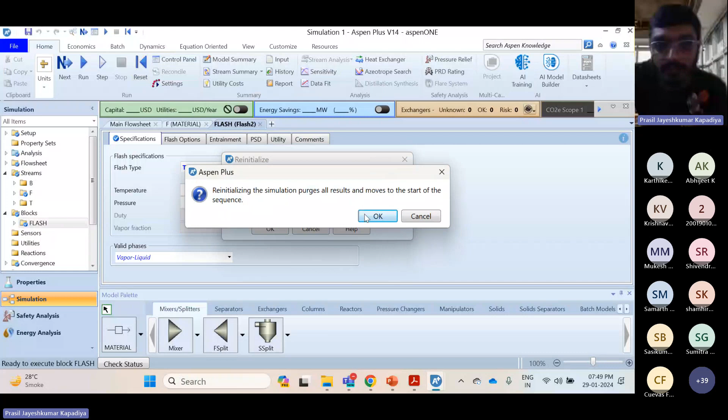Wait, I need to reset it. I will go for azeotrope search option. Why did it fail to launch? I don't know. I need to first run it. First add some conditions and run it. Now go for azeotrope. Oh no, it's not working. Azeotrope search always has issues. Okay, what should I do now?

Can anyone share their screen? I can guide you. I will try one more time. If it works, it works. Azeotrope search is always a problem. Okay, results available. No, it's not working. So can anyone share their screen? I'll guide you how to do it. Can I share? Yeah, okay, you share. Today you are the volunteer. Oh, people are joining at 7:50 also.

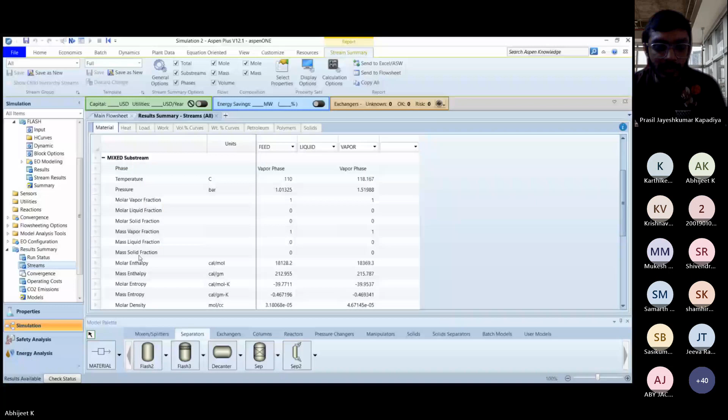Is it visible now? Yeah, it is visible. Now go to home. Oh, you need to set up the problem again, right? It will take time. Okay, just go to that problem. Press back. Now, go to home tab, next to file tab. Now click on Azeotrope Search. I will just show you how to do it. Click on Azeotrope Search.

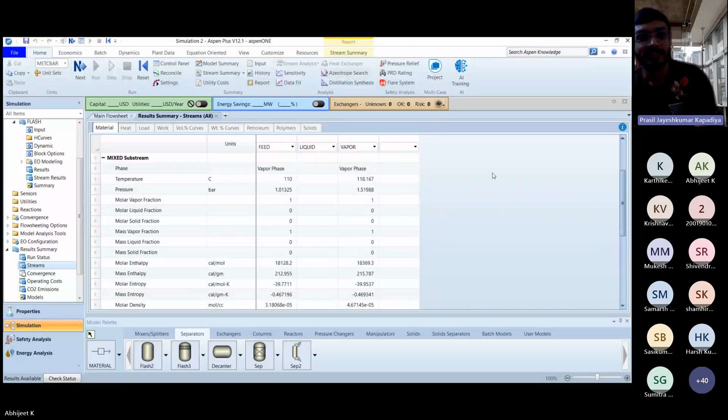It's not responding. It will take time. It is a bit painful. It's not working. It's not responding. Okay, then what I will do next time, I will maybe prepare some screenshots for this, or I will try again. Wait, I have one more file. Let me see if it works. Sorry, I will stop sharing. Okay.

Wait, I will open my actual file, where I don't know if it works or not. We will try once. Can you see my screen? Yeah, you can see. It is problem number 3. Don't worry, there are only 3 problems for today. 4, 5, 6 we will do next time. Okay.

Okay, so what I will do first, I will go to simulation. This is the same problem. I have set up everything. I will enter some conditions. Let's say 100 degrees Celsius and 1 bar. Now I will run it, I guess it will work from here only. Yeah, azeotrope search. Just choose the components, ethanol water, then go to this azeotrope part. Oh yeah, it's showing. Is it clear to everyone?

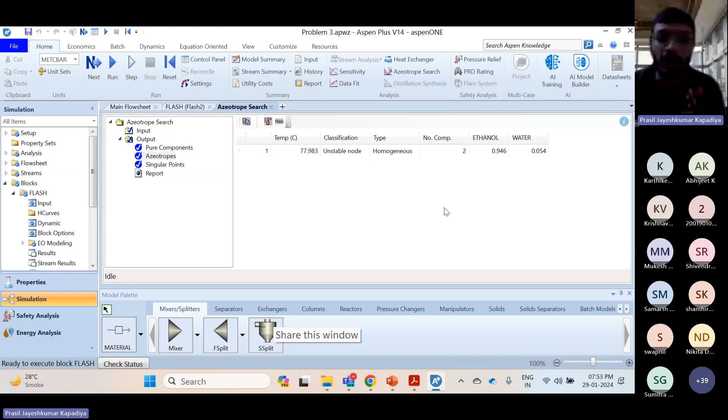What I did? Yes, sir, it's clear. Where did you change the units? Yeah, here, mole to mass. So you can see 94.6 weight percent. And if you go for some different property model, maybe it will give you a bit more accurate results close to the experimental value. Wilson model may not be working properly for ethanol water. So you need to go for some higher degree models, NRTL or something else. Okay. So I will stop this.

Is it clear to everyone? Yes, sir. Okay. And one more thing. Do you have any tabulation for which liquids to use which model? No, we can't find even those kinds of tables. NRTL is the non-random two-liquid theory model. I have written Wilson is used for similar size molecules, and NRTL is used for more complex binary and multi-component mixtures. So ethanol and water are obviously not similar size molecules, right? So the Wilson activity coefficient model won't perform the way it should perform, right?

No, I was just asking, do you have any recommendation or a tabulation for which systems we choose which models? No, at least I don't have anything right now. I will try to prepare for next time. Okay, thank you. If you do it, it would be of great help. But it's not generally like for this system you should do this. Currently I am working on a levulinic acid water system. So we go for the best, and UNIFAC is always best. It's always best to go for the UNIFAC model.

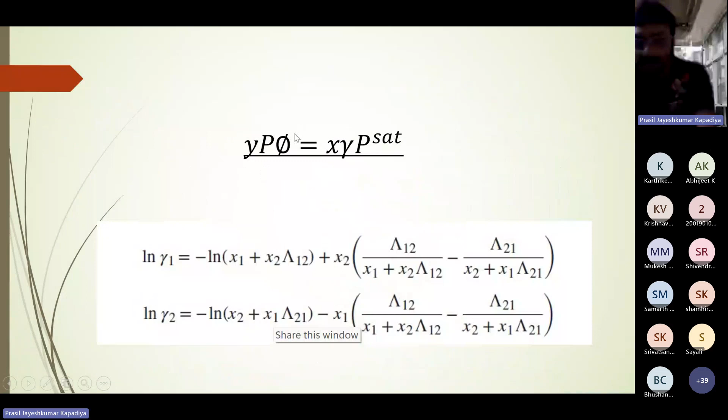So these models, see, this Wilson coefficient model, these are the terms. If we go for higher degree models like the UNIQUAC model or UNIFAC model, the ln gamma 1, ln gamma 2 calculation won't be this easy. There will be many other calculations involved to estimate gamma. So that increases your computational power. So it is somewhere between your computational power and your accuracy. But I always go for the UNIFAC model because it will give you the best results.

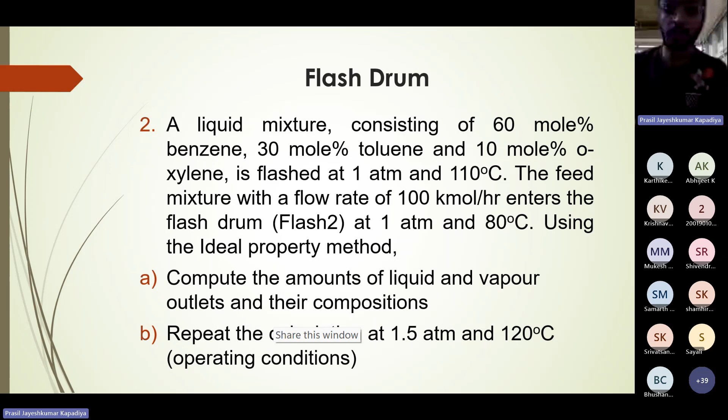Okay, so this problem is also clear. TXY, PXY plots. So what we did today, we simulated one simple flash drum problem. Then in the second problem, we saw that flashing is not happening because temperature is low and pressure is the same. Then we increased the temperature and pressure conditions and saw that everything is converting into vapor phase. So that is called dew point. So we learned the bubble point and dew point concepts, and used them for developing TXY and PXY plots.

Okay. So now some small questions. I guess you are having assignments with these kinds of questions, so I have prepared. What is Aspen? Full form of Aspen? Anyone? Advanced System for Process Engineering. Okay, the full form I have not written here, but you know, Advanced System for Process Engineering. That is the full form of Aspen Plus. Now, second question: Aspen Plus is available for which operating system? Windows. We can't install it in Linux.

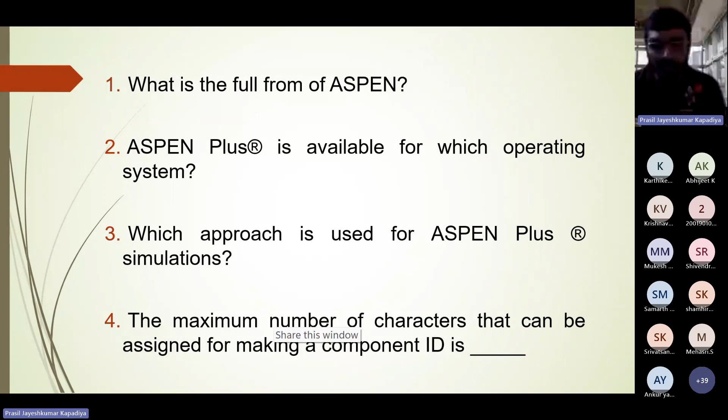Okay. Now, third, which approach is used for Aspen Plus simulations? Sequential modular. Correct, the sequential modular approach we are using. Now, the maximum number of characters that can be assigned for making a component ID is 8. Okay, these kinds of questions no one asked, but your assignments may have these kinds of questions, so I have prepared them.

Now next, sorry, someone is saying something. Hello.

Sorry, someone is... You need to mute yourself.

Okay, what is Raoult's law and when can we use that? Just tell me the equation of Raoult's law. Low pressure, high temperature, non-interaction. Okay. What is ideal Raoult's law? That is yP equal to xPsat. And this is non-ideal. So when can we use ideal Raoult's law? Vapor phase is ideal and liquid phase is ideal. Vapor-liquid equilibrium? No, not vapor-liquid equilibrium. We are performing all these calculations for vapor-liquid equilibrium only.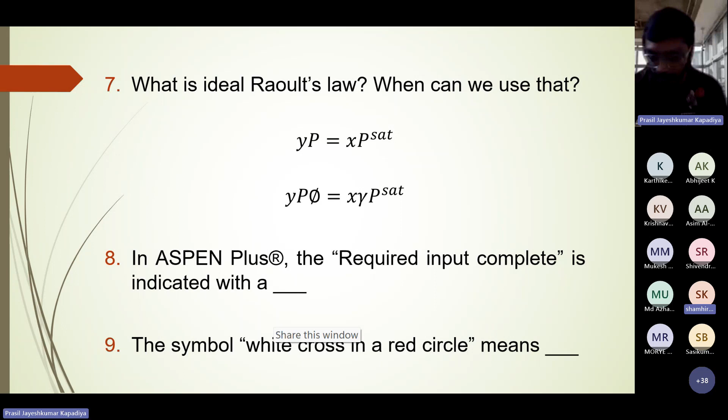Correct? Yes. Next. The flash block in Aspen Plus is used for what? Why are we using the flash block? Equilibrium calculations. What did we calculate? Sorry, you are not audible. Someone was saying vapor phase and liquid phase composition. Yeah, those are equilibrium calculations.

Next question. Which Aspen Plus model is best suited for simulating ideal gas mixtures? Ideal. This is very simple. You can't use RK. Sorry, someone is saying Peng-Robinson. I assume it is a mistake. Only ideal we can use for ideal gas mixtures, that is ideal Raoult's law. You should not use anything blindly; you should know something behind it. What is ideal? That is ideal Raoult's law.

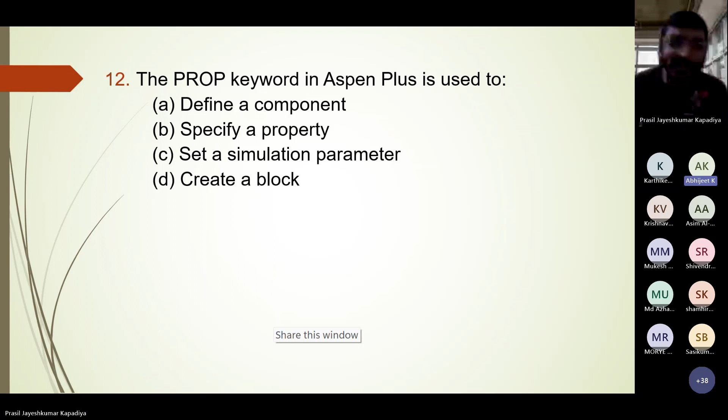Then 12th question. The prop keyword in Aspen Plus is used to select what? Prop means property method. Simple. Specify a property. Yeah, specify a property. Now, which type of block is used to represent a heat exchanger? HX. Yes, HX, correct.

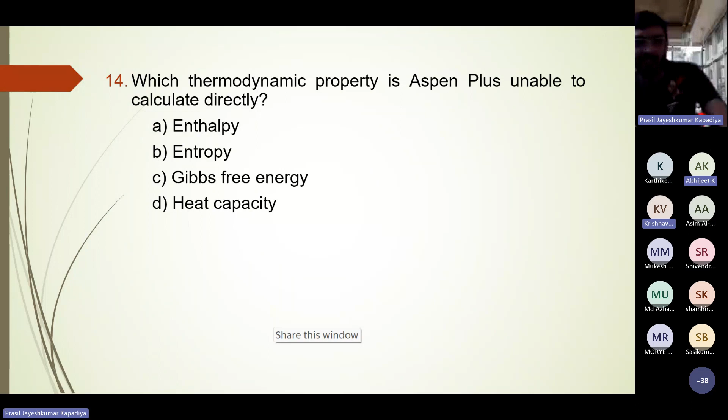Next, which thermodynamic property is Aspen unable to calculate directly? I hope someone answers this. Enthalpy, heat capacity, entropy. Okay, let's see. Why would it not calculate enthalpy? In flash calculation we estimated heat duty, and heat duty is the difference in enthalpy of vapor and liquid streams. So it will obviously calculate enthalpy and heat capacity. Enthalpy is always calculated with a reference, taking zero or some value. What it will not calculate is Gibbs free energy.

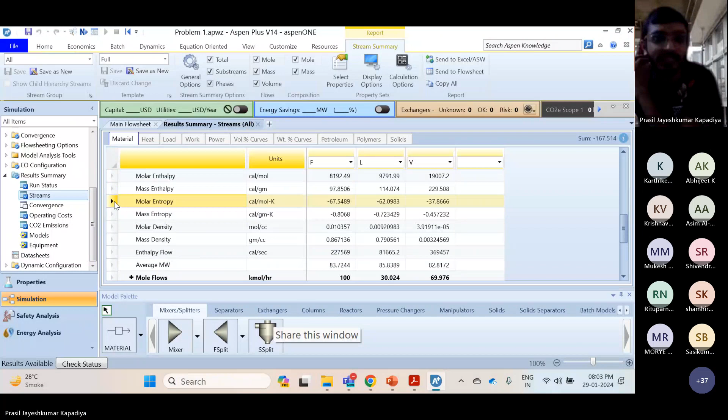Gibbs free energy is not something easy to calculate, actually. Yeah, see. Enthalpy is there, right? You need to analyze what is there or not. This is molar enthalpy. Enthalpy you can calculate. Entropy also you can calculate. Heat capacity I can't see, but it is also there somewhere. Heat capacity is from enthalpy only, so you can also estimate heat capacity. So you can't find Gibbs free energy. Gibbs free energy is something not easy to calculate. That is a molecular formula maybe. So Gibbs free energy we can't calculate.

Now next question: to specify a feed stream in Aspen Plus, which option will you select? Stream option. Correct. Stream. Yeah, correct.

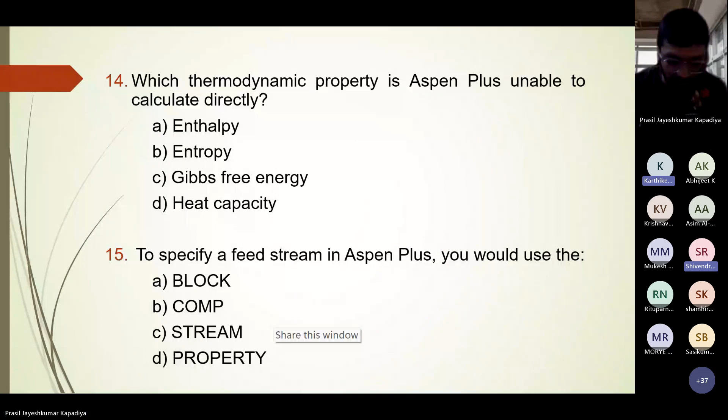Now next question: what are some limitations of using activity coefficient models like NRTL and UNIQUAC? I am asking for limitations. All the above? No, not all the above. Wherever it is all the above, the answer is not all the above. Requirement for experimental data fitting? No, this is the way that NRTL and UNIQUAC models are developed, so that is not the limitation. The limitation is we can't handle ionic liquids. Ionic species we can't handle with these NRTL and UNIQUAC models. Okay.

Now, okay, this is very easy. Someone respond. What type of file extension? BKP. Yeah, .bkp. Next, what does the term flow sheet refer to in Aspen Plus? Option B. A diagram representing process flow. Yeah, that is what we did, right?

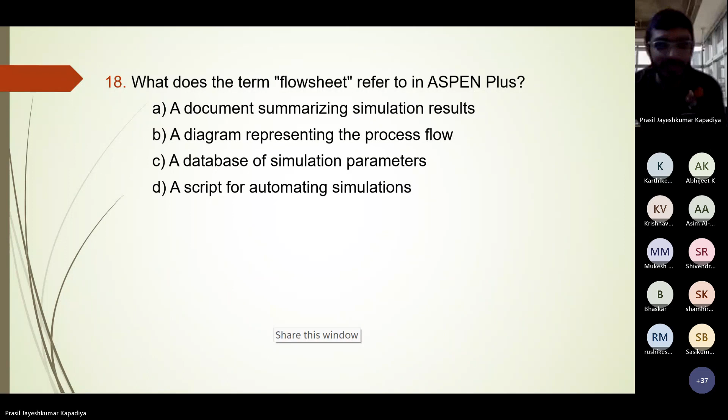Now next, what is the purpose of the flash block in Aspen Plus? Why did we use it in Aspen? To separate a mixture. Option A. Yeah, we separated the mixture into two or more phases. It's a single stage operation, flash drum. Okay. Now next, what is the role of the reactor block in Aspen Plus? Very simple. Chemical reaction modeling. Yeah, we are modeling chemical reactions using the reactor block.

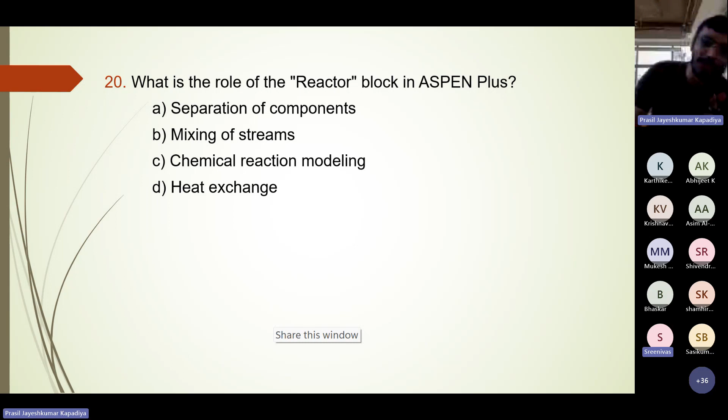Which unit operation in Aspen is used to separate components based on their boiling points? I mentioned this. Distillation column. Right. Now, what is the purpose of the splitter unit operation in Aspen Plus? Divide a process stream into two or more streams. Option B, correct? Splitter we will see in next class. Sir has covered in week 2 splitters, mixers, then distillation columns, then the extraction unit and heat exchanger unit also. Next week you are going to solve so many problems, if I am able to prepare.

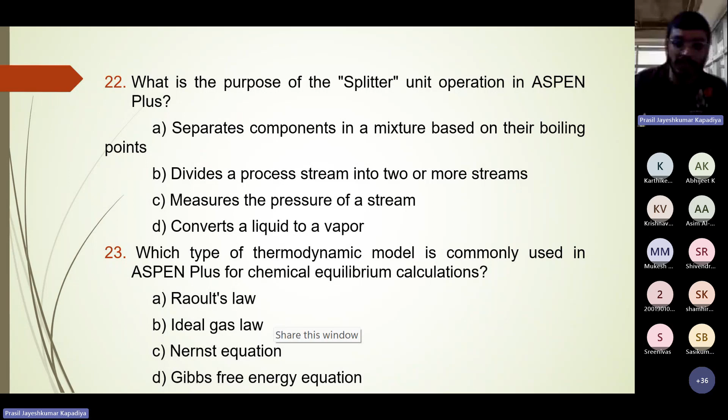Then this question: which type of thermodynamic model is commonly used in Aspen Plus for chemical equilibrium calculation? Raoult's law. Why is it not ideal gas law? We use ideal somewhere, right? So why is it not ideal gas? Ideal gas law is different. Exactly. Ideal gas law is different, and the word ideal that is written in the property method, those two terms are different. Ideal is Raoult's law. Answer is Raoult's law. Nice, you are paying attention.

Now, what is the purpose of a block in Aspen Plus? C. To represent a unit operation or piece of equipment, correct? We used flash as a block, and that is representing a unit operation, right? Yes. Now, maybe last question.

I'm sorry, just a minute. Someone is trying to join at the end.

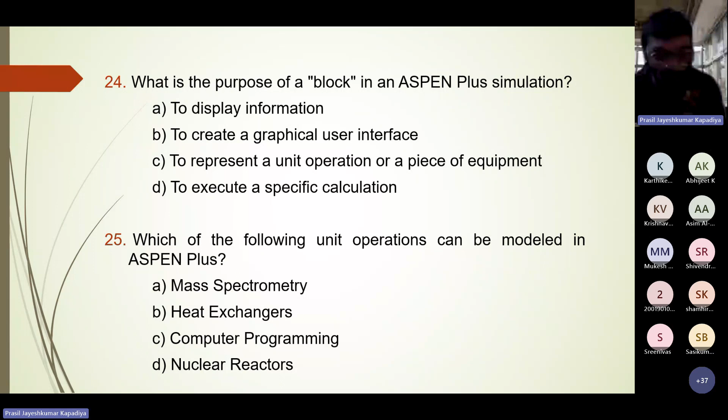Okay. Which of the following units can be modeled in Aspen Plus? Heat exchanger, computer programming, mass spectrometry? Option B, heat exchanger. Yeah, heat exchanger. Mass spectrometry we can't do with Aspen Plus. Computer programming we don't need to do with Aspen Plus. A nuclear reactor is not an easy thing to just model with Aspen Plus. So this is all about today.

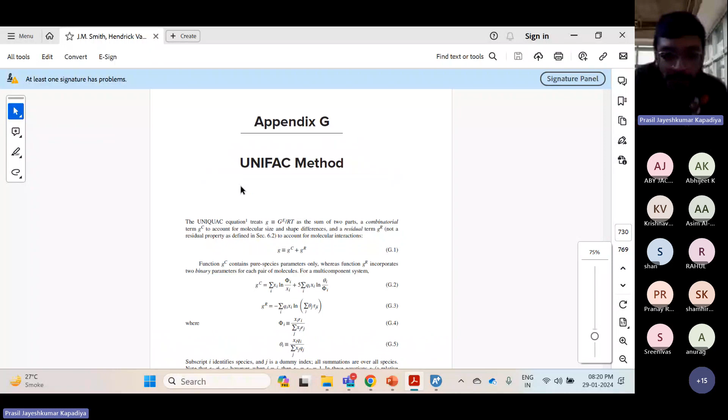All of Raoult's law, modified Raoult's law, then various activity coefficient models, those are there. Okay, this is the UNIFAC model. Someone was asking, so I'll just show you how complex it is to calculate the activity coefficient. See, the equation is completely complex to understand. In the UNIFAC model, it is combinatorial plus residual part. The combinatorial part is itself this, and the residual part is itself this. And these parts already have their subparts.

It is very complex to calculate compared to what we did with the Wilson equation. But Aspen Plus is calculating everything, right? Yeah, it is calculating everything itself, but you should know the basics. You should know what is behind it. I won't suggest you remember equations, but if someone asks you what the UNIFAC model is, at least you should know the basics, why you need to choose the method, and how it is calculated.

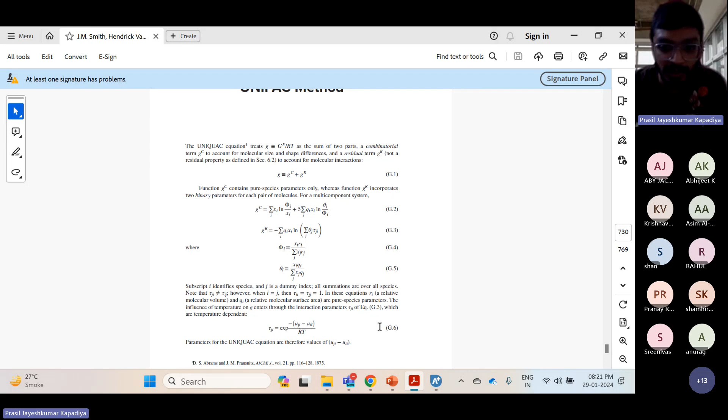It is based on group contribution methods. It considers a combinatorial and a residual part. And in this term you can see Uji, Uii. Those are interaction terms. You should know these things. This interaction term is dependent on temperature. This also you should know. It is quite obvious: if we change the temperature, interactions will also change, right? So these interaction terms are temperature dependent terms. These basic things you should know.

We were supposed to solve this UNIFAC model, and we were supposed to write theories about the UNIFAC model in the exam. But if you don't know the equation, that is perfectly fine. Equations are always there in the book, but you should know the basics behind them. Yes, this is the main thing, right? We need to choose the correct property method to run the simulation. But I don't have any idea how we can choose the particular property method for a particular case.

I will not say what is correct or incorrect, but among these models you can see NRTL, UNIFAC, UNIQUAC, VTPR. VTPR you will not find in this book. VTPR is an advanced level thing. Okay, I'll show it to you. How do you know which method to choose? Through experience, or is there any way to choose the method for a particular process? Currently I'm pursuing my research work on phase equilibria diagrams. From my experience, the VTPR equation of state is currently the best, predicting near to what it should be.

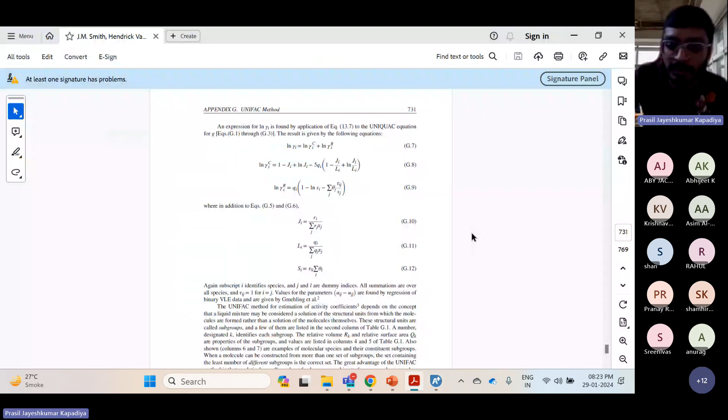That is volume translated. If you know the SRK, PR, RK equations of state, they don't have the Vc term in the equations, but the VTPR equation of state additionally takes the Vc term, that is critical volume. That's why it is called volume translated Peng-Robinson. I will frankly say I don't know the VTPR equation, but you should know the concept. So you can refer to this chapter, I guess it was chapter 12. Even if you don't understand everything, you'll get some idea. That's my point.

Okay, anyone else? Or should we stop? Yes, sir. Hello, sir. Thank you very much. It's a very nice lecture. Even though it's basics, it's very good.

I'm using Aspen Plus since more than 15 years. More than? More than 15 years. Oh, great. I just want to see any new things you are teaching. It's really very good because we forgot all these equations. We know how to use it, but we don't know what all these equations are.

I passed GATE in 99, and with the work in industry we lost all these. You are senior than me, and you have very good knowledge than me. No, it's good that you are teaching from the basics, so I want to refresh my thermodynamics. We also studied the same book, maybe the second edition, but we are showing the eighth edition of Van Ness. I guess you can download this book. Yeah, we can get whatever we want here in the plant.

All the best for your PhD. I also have a doctorate degree from National University of Singapore in advanced process control. Oh, great. Just want to introduce. I am currently working in Saudi Arabia. Advanced process control is a bit difficult thing. You're from NTU Singapore? NUS Singapore. Okay. It's really good. I will attend your lectures and give you the feedback.